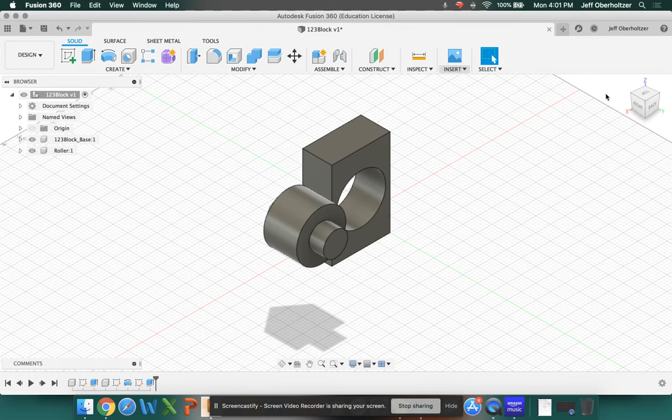If you recall in Inventor, you would normally start an assembly as a separate thing. You had to go to New, open up an assembly, and then begin importing parts. Fusion is more native to this process because you already have your parts out here. Now they're just sitting there, and you simply have to create an assembly.

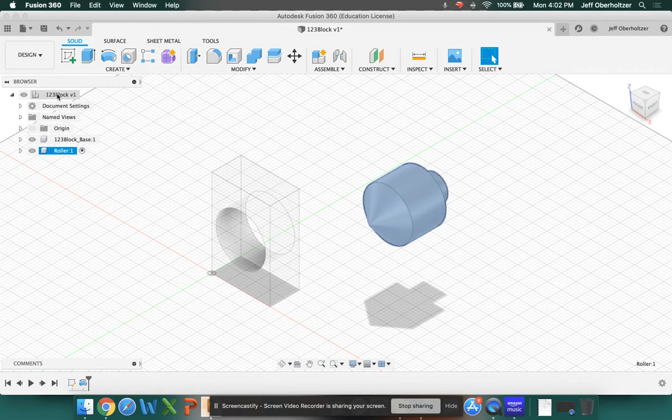Couple things we had to do. Previously, we were either on our roller or on our block, and I'm going to activate the roller. So this is what our screen looked like. Before we do an assembly, you're probably going to want to activate whatever components you need. So I'm going to go up here to the very top where it says 123 block version 1, activate the component using the radio button. Now both of them are turned on.

In order to create an assembly, we'll go over here to Assemble, and I'm going to choose Joint. In this case, this is going to be a parent-child relationship, very similar to what you're used to in Inventor. In other words, the child is going to run to the parent, so one of them is going to move and one's going to be stationary. That's important sometimes.

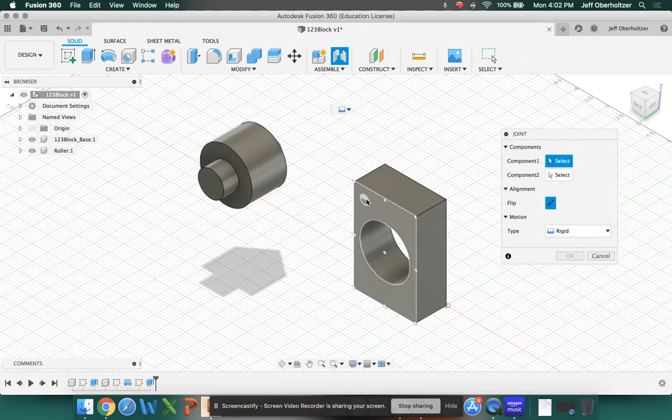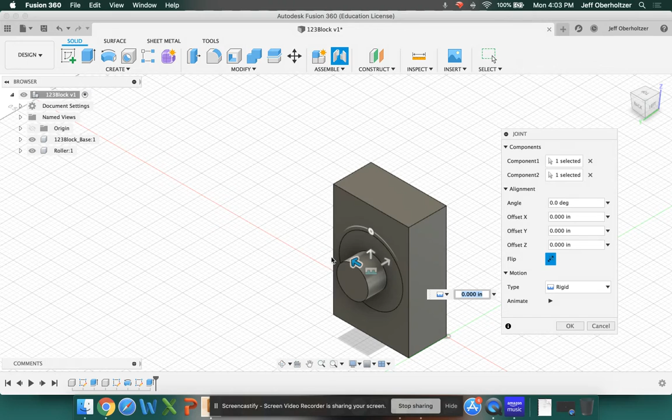It's already asking me for component 1. I have this journal right here, and I want this face of the large journal to land even with the face of our 1,2,3 block. So I'm going to find the center point right there, and jump over to our 1,2,3 block that now has a matching bore, pick up this face and get the point right on the end of that. When I click on it, of course, it's going to jump into the bore, very much like you're accustomed to. The nice feature in Fusion is instead of having to go back into the menu and make adjustments, I can now just click and drag if I want to. So I can move it that way. I could actually bring it up if I wanted to, although I don't want to.

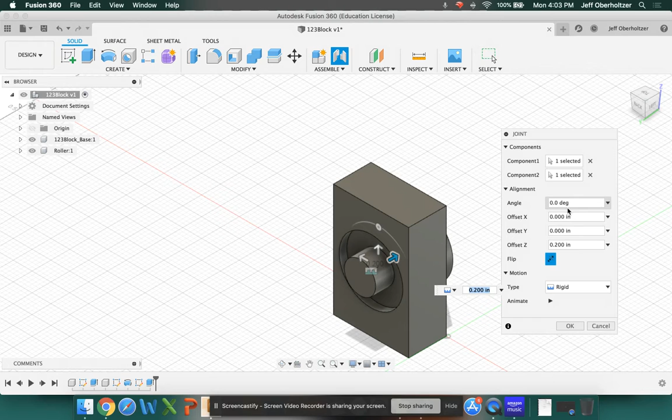We can change the positioning of this roller inside of that bore very, very easily. We could even change the angle of rotation. Kind of hard to see because it's completely round with no identifying feature, but you get the idea. You have those freedoms in here. That's a lot simpler than what you're accustomed to. And yes, you do have the flip command. If I flip it, it will turn it around. But we're going to keep it the way we had it.

Once you have everything set, of course, hit OK. And now we've got our part situated inside that block.

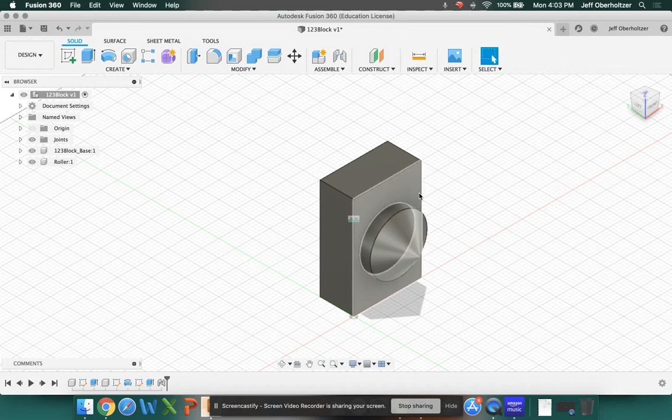The other thing I would like to do is change the color of my component, or at least one of them, so they don't all look like they're one thing. I'm going to go underneath the Modify tab, down here at the bottom it says Appearance. I'll choose Appearance. You'll get a screen very similar to what you were used to in Inventor, and there are lots of different materials and things in here. If I wanted to go under Paint, maybe I'll just go under Glossy.

Open those up, and you've got basic colors, and yes, you can double click on them and change them. But for the time being, let's say I wanted to use this metal flake. Notice that it has a download button next to it. If it has a download button, just click on it, and it will enter it into your library. So maybe we'll use the green one this time. I'm going to download.

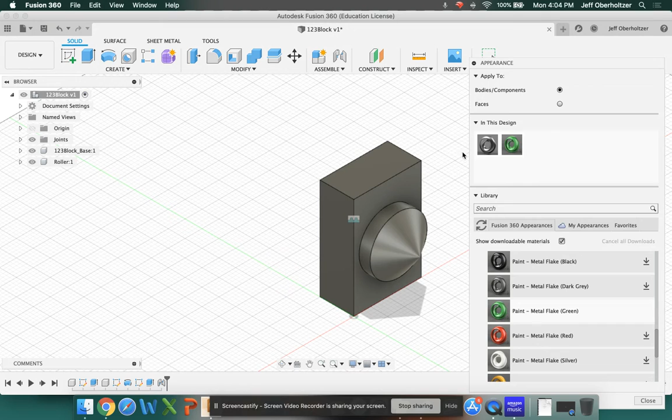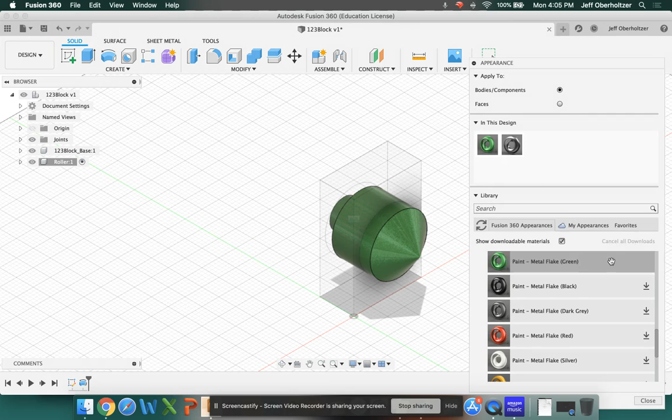It's pulling it in, and of course, just like before, drag this up to the top right there. Then to select a component, I can go over here, activate it, or just click on it, and that kicked me out. But we got everything here. Now what I'm going to do is simply drag this onto what I want. And now it's changed. When you're done, as always, click Close.

And then let's turn everything back on. Now we've got our gray block with our green metallic roller in there. So that's definitely one of the things that you can do.

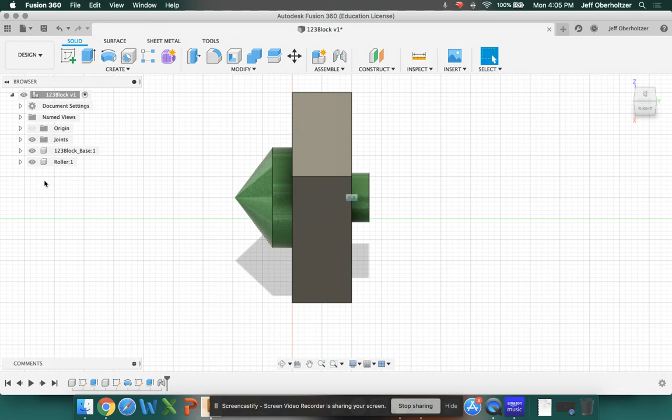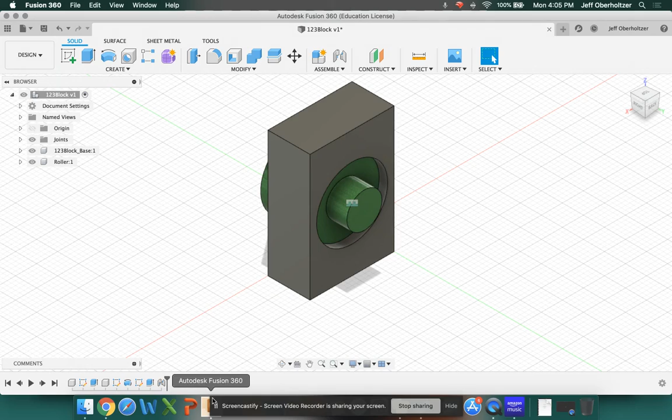I also want to point out your timeline down here. Notice that just like you're used to in Inventor, where you could go up here and click on different functions to change it if you had to go back, I can make adjustments here simply by double clicking, or I can actually roll the timeline back. Maybe there was a change there that I saw something I wanted. I'll leave it the whole way open. Maybe I want to change this extrusion, so I'll double click, and now it's going to kick it out for a second, and I can move that around a little bit. So we'll go 1.2, it's not going to make any visible change. I'll click OK, and when I click OK, it's now made that change. Very, very functional feature of this. You're going to need that at some point if you have to make modifications.

The next tutorial that I'm going to show, I want to talk about a few other things that you can set as far as preferences and settings, especially if you're getting frustrated because you're stuck in millimeters. We're going to talk about that, and that should hopefully wrap us up with this. I'll see you in part 5.